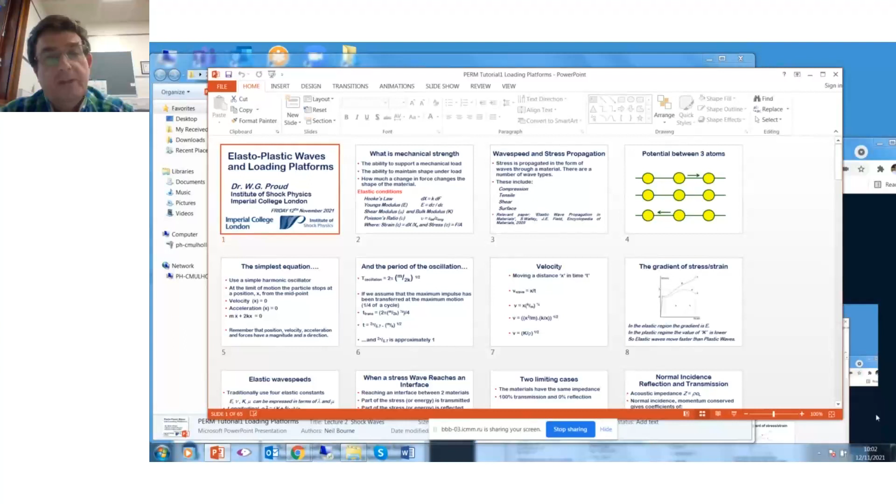I have 65 slides, which is a lot, but what I hope to do is talk more generally and not go through every single derivation, and mainly to give people an overview. And people can ask questions as we go along. If I don't get to the end of this presentation today, this is a series of 7 presentations, and people can send me questions in between presentations. I don't mind answering. I want to make this easy and happy for people.

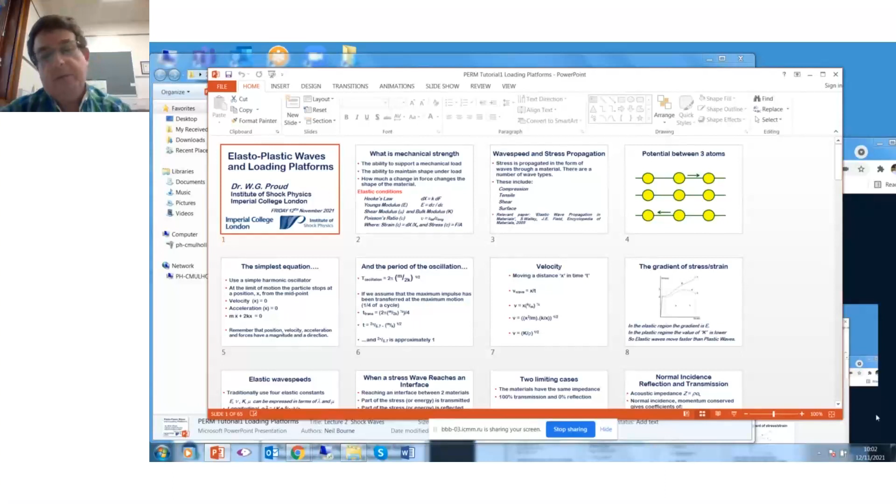You are very kind. It means that we have opportunity to ask you during the presentation. Absolutely, absolutely. Thank you, Oleg. If you ask me lots of very deep philosophical questions, I think I might take a lot longer.

So this morning I'm just going to give an introductory talk about elastoplastic waves in very general terms, and discuss loading platforms, again in very general terms. There is a lot of detail you can find in the scientific and technical literature, so this is very much an overview. There is a review article from 2005, 16 years ago, that I was a co-author of, and I've shared that with Oleg, and you are very welcome to have copies of this and read it at your leisure if you want to look in a little bit more depth.

So when I start talking about loading platforms and waves, I ask students and my colleagues, what is mechanical strength? Well, you put a load, a force on something and it supports it. That's the definition of strength. Another definition of strength is the ability to maintain shape, because we know that stress, the load, and the deformation, strain, are linked. And strength is basically how much a force changes the shape of a material.

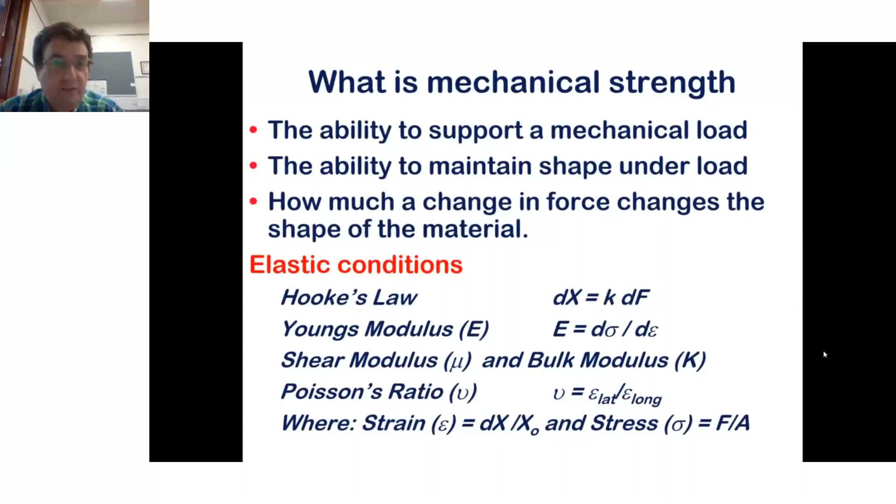So when we think about a load being applied to a material, and particularly a load that's being applied dynamically, the stress is propagated through the material in the form of a wave. And just as there are different types of strength, there are different types of waves. There are those which compress the material, those which try to extend the material, we'll call them tensile waves. We have waves that try to move material laterally to what we consider the normal loading direction. Those are shear waves. And there are waves which tend to propagate along the surface.

There is a paper I provided to Oleg where my colleague Stephen Walley and my former supervisor, Professor John Field, talk about different types of waves. And please, again, read that article if you can. It's a very good summary.

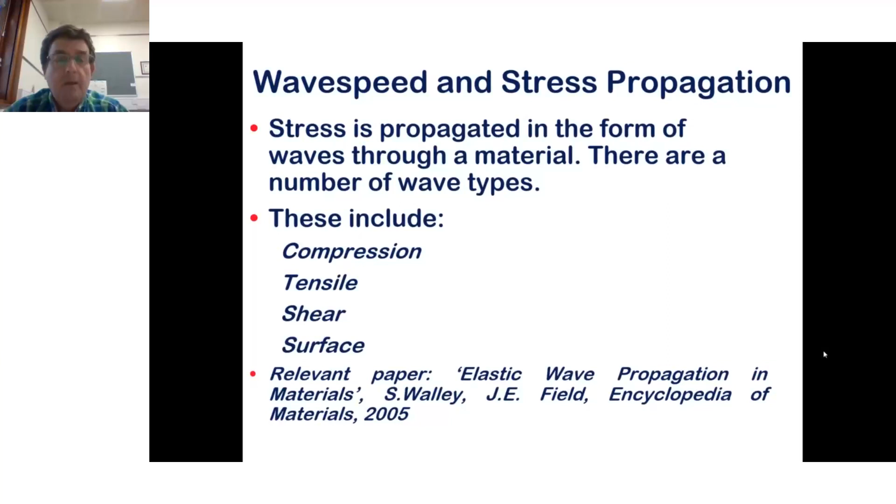If we think about wave speed and strength, we feel there must be a connection between the two. So in a very simple way, and here I am basing my explanation on the work of David Tabor, who was one of the founders in the Cavendish Laboratory of Western European studies on friction, modern versions of friction.

If we look at the potential between three atoms, so here, very standard representation, the yellow circles are atoms, and the line represents the bonding between them. And what we see at the top is there is an atom, and it moves, in this case, in the right-hand direction towards that atom. It then moves backwards to the middle, and then it moves off. So it oscillates between the two atoms. It vibrates between those other two outer atoms.

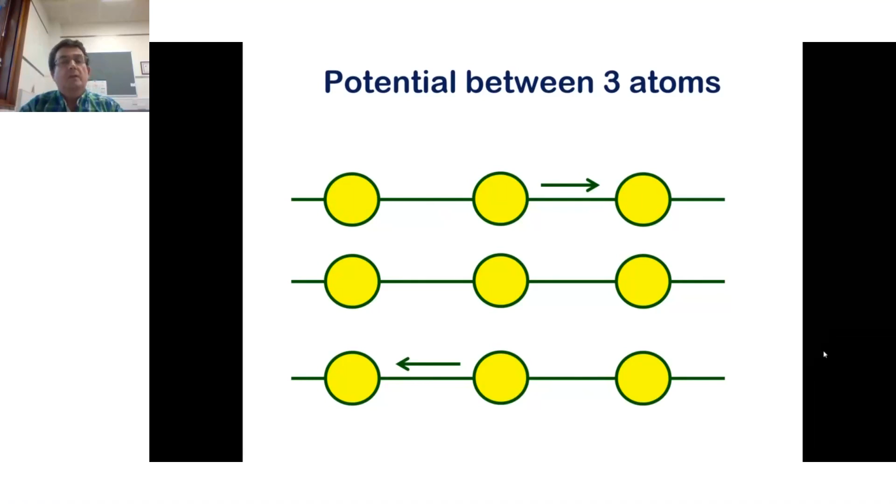So if we want to approach that simply, we can claim it's a simple harmonic oscillator. And as a result of that, we have a particle which moves and then stops at the limit of motion from the midpoint, and then it gets accelerated by the repulsion from the atom it's nearest and the attraction of the atom it's furthest away from. And so we have this oscillating object.

Very simple equation. Velocity x dot is 0 at the limit. The acceleration is minimum at the limit. The acceleration is maximum at the limit, and we can link those two, remembering that position, velocity, and acceleration have both magnitude and direction. So very simple equation, nothing that should cause people too much difficulty.

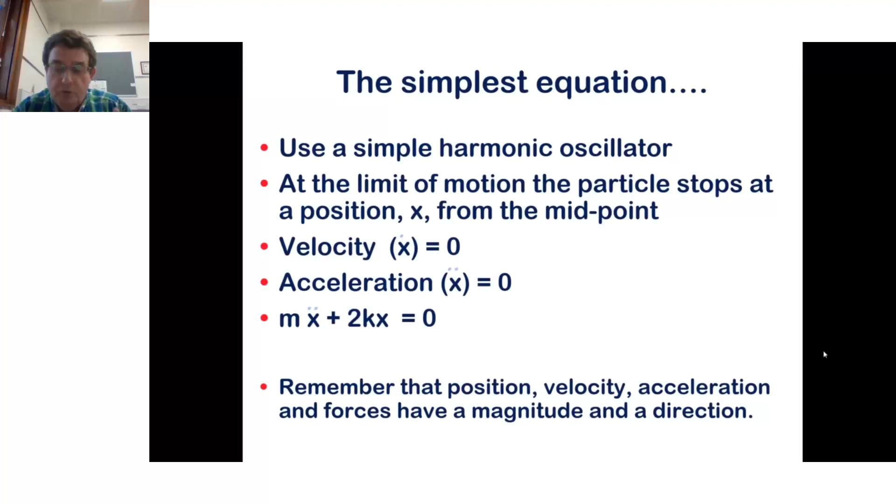If we consider it as an oscillator, that oscillator has a time period, and we can look at what is the frequency of oscillation of a simple harmonic oscillator, and you will have this equation: 2 pi and the mass of the system divided by 2k, and k is basically a measure of the force of those springs. It's the spring constant that we have between those atoms, and that's square rooted.

Now the next part requires an assumption. It's not a very big assumption, but if we assume that the maximum impulse is transferred at the maximum point of motion, i.e. a quarter of the cycle, then we can say that the time for maximum stress transfer, the maximum force between the oscillator and its neighbor, is a quarter of the time cycle. So there, I've just taken that, divided it by 4.

And then I'm going to combine it. And what I'm going to get is time equals 2 pi divided by 5.7, m over k to the half. And 2 pi over 5.7 is approximately 1. You can tell me it's not exactly 1, and I will tell you you're right. You can tell me that there are other ways of deriving this equation, and again, I will agree with you that you are correct. This is just a version that I'm presenting in a very simple way.

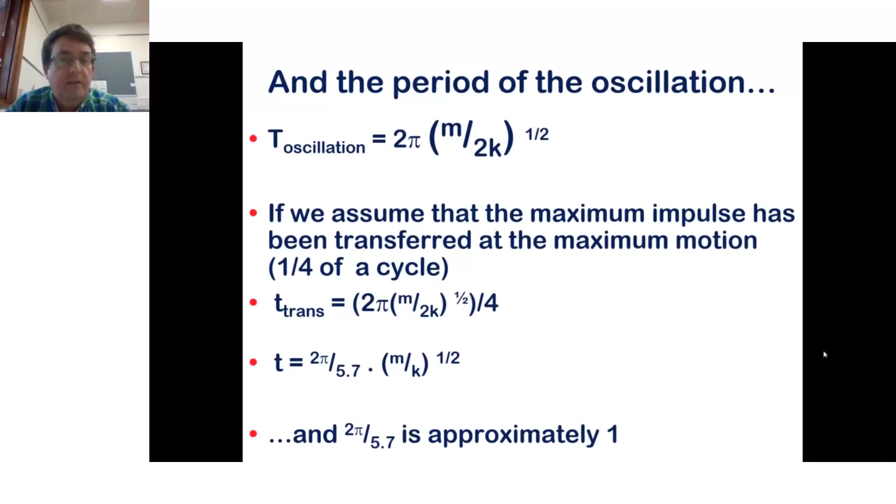So if we think about velocity, velocity is distance by time, which is velocity of a wave representing as movement of stress. The velocity of the wave is distance divided by time. Well, what is the distance? Well, this is this distance x between the atoms. And what is the time? Well, we've talked about the time it takes to transfer from more or less zero stress to maximum stress.

We can combine those terms. So x, we've got this x step in the middle. Velocity equals x brackets k over m to the half. That is the time expression. Now, what is x? X is a distance. Now, we can express distance in terms of density if we remember to basically separate variables. So what we've done here, we've taken that thing and we've separated it into a density term and a thing called k over x.

Okay, so what is this saying? Well, m over x cubed is density. That's that. K, or force divided by distance. Force and distance, that is force being applied and distance, or strain if you want to call it, or motion in the sample. So that is basically strength. So that term, k over x, is a strength term. The ultimate outcome of doing this type of analysis is to say that the velocity of the wave is equal to a strength term. In this case, it's the bulk modulus, because those atoms were moving in the bulk, divided by the density of the material to the power of a half.

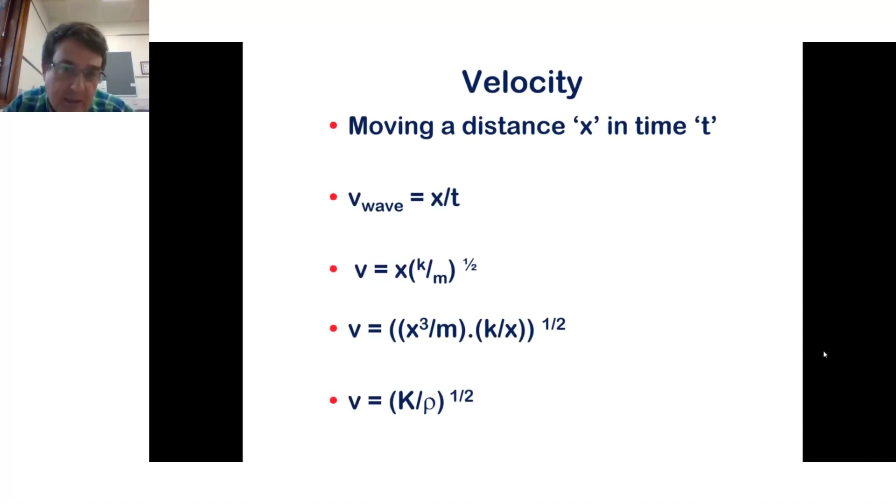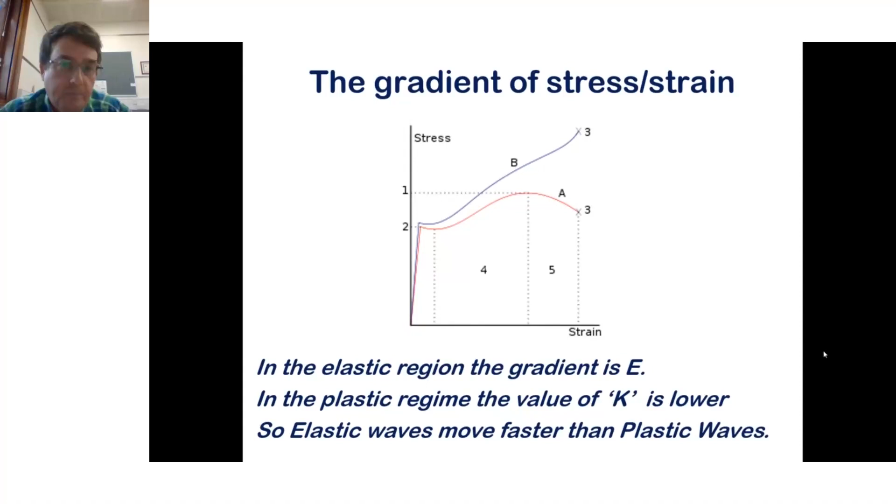So traditionally, we use 4 elastic constants: longitudinal, transverse, bulk, and we have constants, sometimes called Lamé's constants. You can read about those in the literature, which help us define it. But the main thing on this slide is to know that the longitudinal, the transverse, and the bulk wave speed are related to one another in the simplest form via very straightforward equations. These show it. Now, we shouldn't be surprised that the bulk wave speed squared equals bulk modulus divided by density. That was the thing we derived a couple of slides ago. But the other ones follow a very similar process.

The one thing I point out to you at the bottom is a wave speed in the rod. A rod is the Young's modulus, E, divided by the density. Not surprising, Young's modulus was worked out by looking at loading on rods. So it's not at all surprising that the wave speed on the rod is defined by Young's modulus.

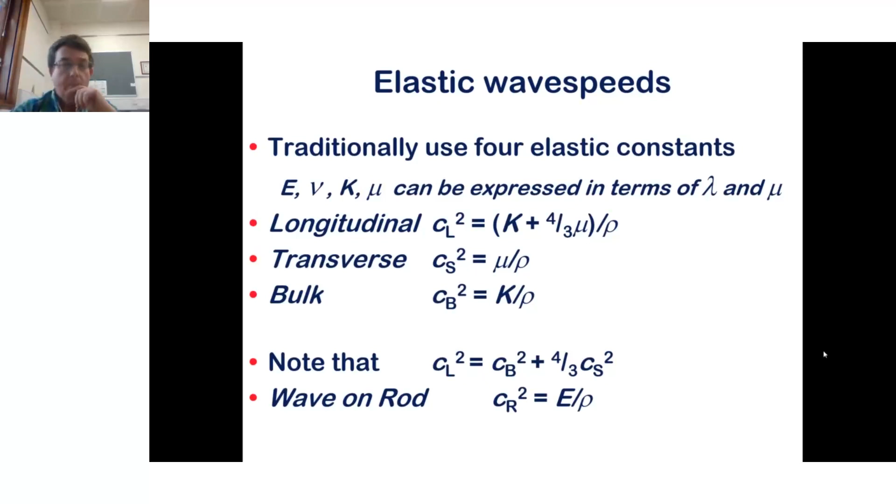Now, in our field, when the stress wave reaches an interface, there's a balance between the two materials. Part of the energy or stress is transmitted, part of the energy is reflected. And this is an issue of conservation of momentum. So we have waves reach interfaces. Some of the wave energy is sent through, some of it's reflected.

What is the controlling property? It's a thing called the acoustic impedance in the elastic regime. And the acoustic impedance is the density multiplied by the sound speed. If you want to try and rationalize what this means, it's effectively the mass per unit time you can put into motion. And it is a material property. Density and sound speed vary from material to material. So acoustic impedance controls the transmission at interfaces.

Now, there are two limiting cases. Two materials have exactly the same impedance. That implies that you get 100% transmission of stress through interfaces and zero energy reflected, or the materials are completely mismatched, meaning one of them has either infinite or zero acoustic impedance, extreme limit there. In that case, zero energy is transmitted and it's all reflected back at you.

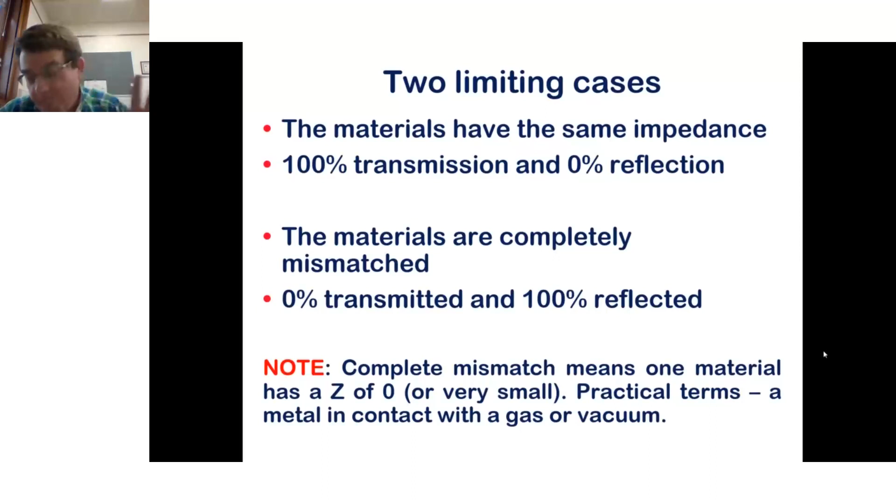It also happens that gold, as in the precious metal gold, and diamond, as in the form of carbon people seem to pay a lot of money for, actually have very, very similar acoustic impedances. Don't try this experiment at home: it's very hard to get a diamond to jump out of a gold ring by hitting it, because there is no wave mismatch at the interface between the diamond and the gold. Just a little fact there.

So as well as complete transmission and complete reflection, you can have some defining equations, and these are given here. T is the amount transmitted. It depends upon a stress wave going from material 2 into material 1. Okay, the amount transmitted is equal to this term here. It can be worked out by conservation of momentum. It takes a couple of pages of A4 to work through this. Again, not terribly difficult. The amount reflected is dependent upon the difference in impedance.

But if you think about, say, a polymer-metal interface, well, a polymer has a low impedance, I'll say that in a lot of these talks, and the metal has a high impedance. What does a negative reflection coefficient mean? What it means is that something which was originally a tensile wave, something that is reducing the stress in the system, is reflected as a compression wave, so it changes phase. Hopefully people are familiar with reflection at interfaces and realize that sometimes you get changes in phase of light, changes in phase of stress waves when things are reflected from interfaces. And basically this is assuming normal incidence of the wave, so the wave going straight into the surface.

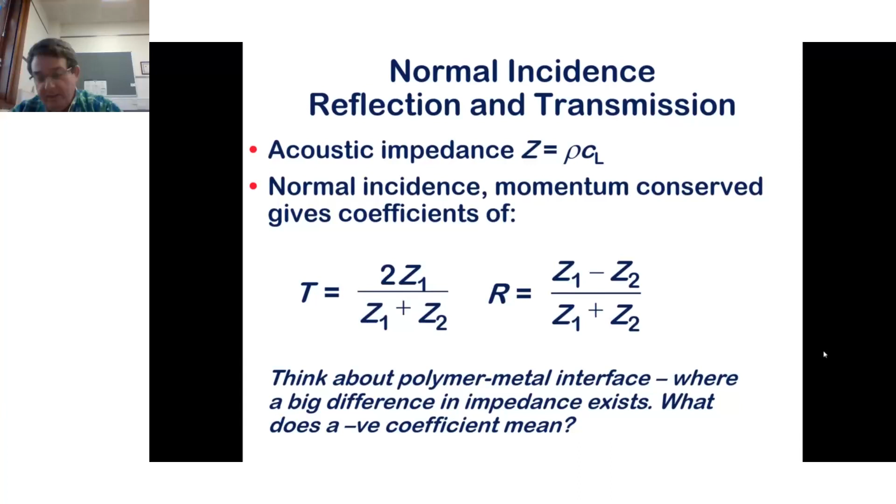And the relationship between stress and particle velocity in the system can be derived in a shockwave lecture, which I'll give. The defining equation here is change in stress equals density times sound speed times change in particle velocity. Particle velocity changes at the interface, changes due to transmission of energy through the material. So the change in stress equals density times sound speed times change in particle velocity in the elastic regime.

And when I go into a shock regime, when I go to very high pressures, then the sound speed of the material changes. And that means that that term C stops being C and becomes something more complex. Not generally very much more complex, but it becomes a term that is stress dependent. But simple equation, change in stress equals density times sound speed times change in velocity of the particles in the material. And that means you can start to track what's happening at interfaces and what's happening within materials.

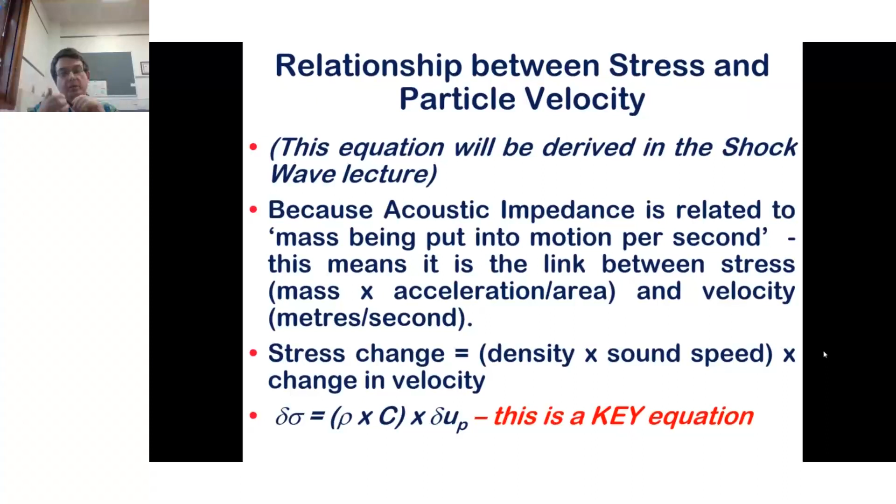So, dynamic testing of materials. I've set up some basic concepts there, hopefully very straightforward for you. Revision, you'd probably tell me that you've done more complex analysis, and you're absolutely right. Okay, dynamic testing of materials. So it's the 19th century. People are building bridges and trains.

They're building metal structures. They're developing engines. High loading rates on materials become more common. And also, people have greater control of the materials they are using. They're using engineering materials. They're using motors. They're using cutting machines, etc. So dynamic response of material becomes important.

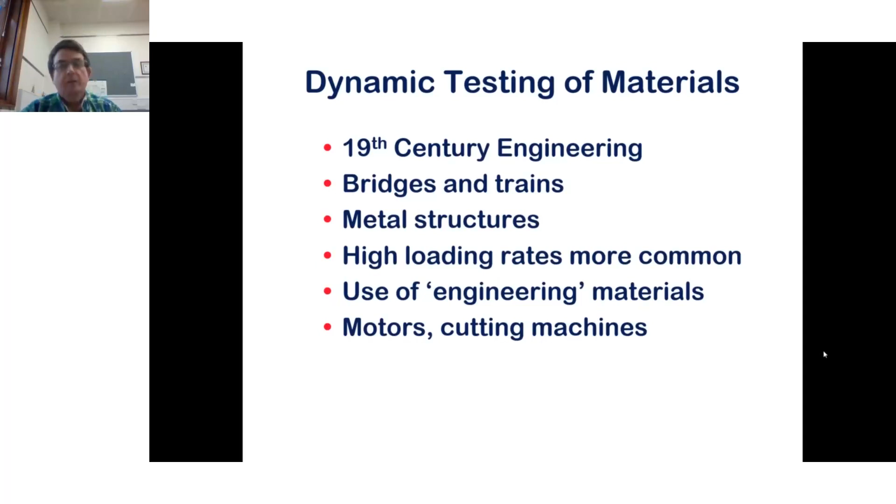So this gentleman here is John Hopkinson, Professor of Engineering, King's College London. And he had an experiment where he had a wire suspended between a flange, a weight at the bottom, and the ceiling. And the wire was about 10 meters long. And he had an annulus. This is this kind of cylindrical thing in the middle that he used to drop along the outside of the wire, and it hits the weight at the bottom.

And what he discovered doing these types of experiments on wires was the failure of the wire does not depend upon the kinetic energy or the mass involved, but it was very strongly dependent upon velocity. Yes, you could put a static weight on the system and break the wire. Absolutely correct. But if you're doing a dynamic loading, velocity turned out to be a key component.

And what he discovered in more detail was if he dropped the weight from a very low height, the wire didn't break. Absolutely fine. It's within its elastic limit. It's within its normal strength. If you hit it very hard, it broke instantly, and it broke at the bottom of the wire.

But there is a range of energies where the wire breaks at the top or the bottom of the wire. So there is this intermediate range where you cannot say in advance where the failure will occur. Hit it very hard, the wire will break at the bottom. Slightly less energy, top or the bottom. So this got people thinking about waves moving through materials. This is a very key experiment in starting this field.

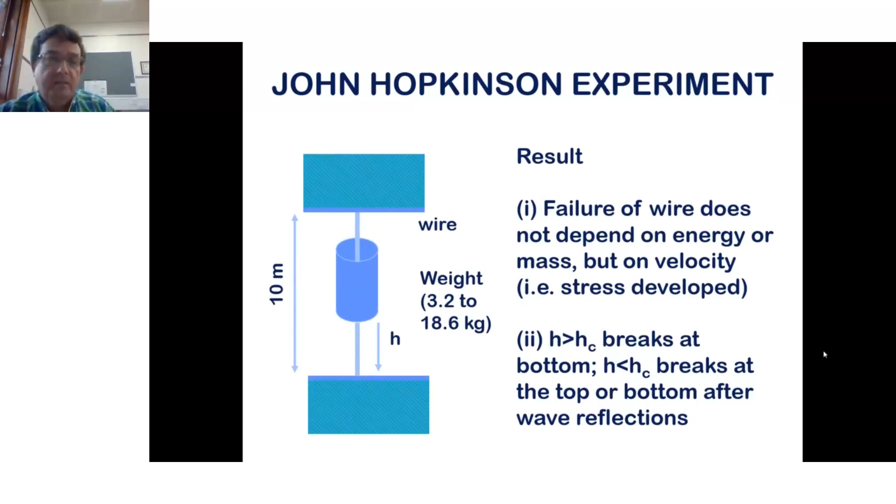So basically, if you've got a weight hitting the bottom of the wire, then it puts the wire into motion. And so the stress you're developing will be density of the wire, the sound speed in the wire, which we know is related to Young's modulus, and the velocity of the particles within the wire. So the stress developed was equal to rho C V.

When that wave gets to the top of the wire and reflects from the ceiling, it comes back reinforced due to a wave reflection, due to the impedance mismatch at the ceiling. Basically, the ceiling, you hope, doesn't move very much. It's very rigid. That wave comes back reinforced, and the reflected stress is approximately doubled. Not quite 100% doubled, but certainly 99% doubled.

What he also discovered is the dynamic failure stress with this loading was much higher than the static failure stress. That was a key discovery. So velocity is important in the failure of materials, and dynamic failure happens at stresses which are higher than static failure stresses. This is the foundation of this entire field.

People in later years studied materials at different loading rates. So here I have a graph. It's log of loading rate, epsilon with a little dot on top, on one axis, and stress in gigapascals is on the other axis. And what we see here is a very standard relationship that when you're going from strain rates of 10 to the -4, quasi-static creep loading, to strain rates of round about 10 to the 0, that is a kind of standard mechanical engineering laboratory test that you would conduct on materials.

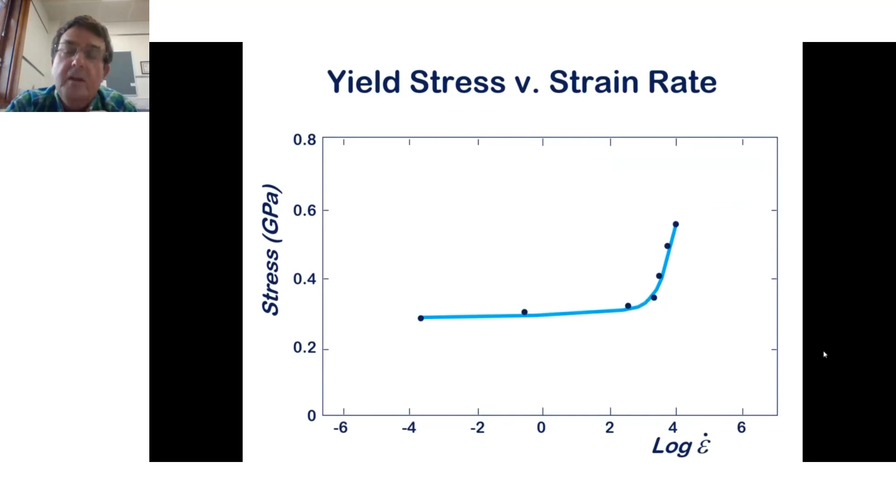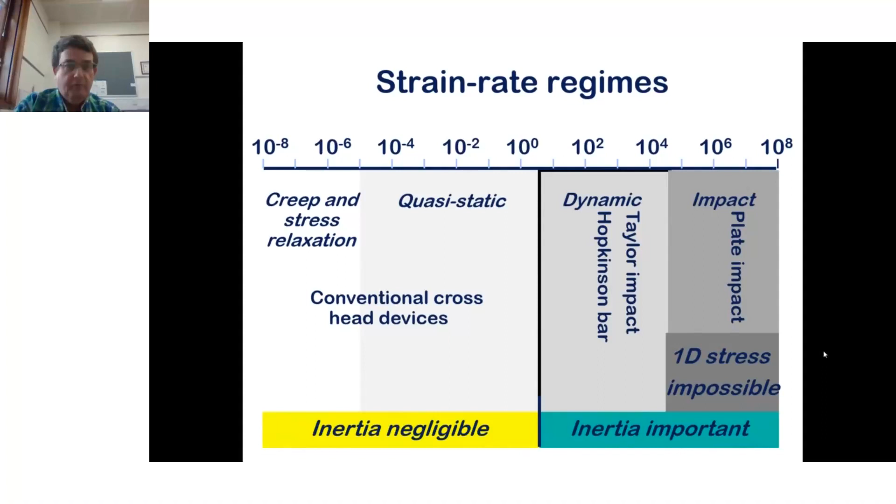And what we have here is a rough division between creep stress relaxation processes, quasi-static processes, dynamic processes, which are 10 to the 1 and above, Hopkinson bar, Taylor impact, which I'll mention in a little bit more detail, ultimately going up to regions where the sample basically doesn't have time to respond in a homogeneous fashion. The system becomes very much wave dominated, and that's investigated in the shock regime. And you can see at the bottom, inertia is negligible at low rates, increasingly important as you go to those higher rates.

So John Hopkinson, unfortunately, died, as is indicated here, in 1898. He also died with his older son and a number of daughters. They were walking in Switzerland, and unfortunately, some part of the mountain fell upon them and killed them. So because of this, the Department of Engineering in Cambridge wanted another professor of engineering. So they chose John Hopkinson's second son, Bertram Hopkinson.

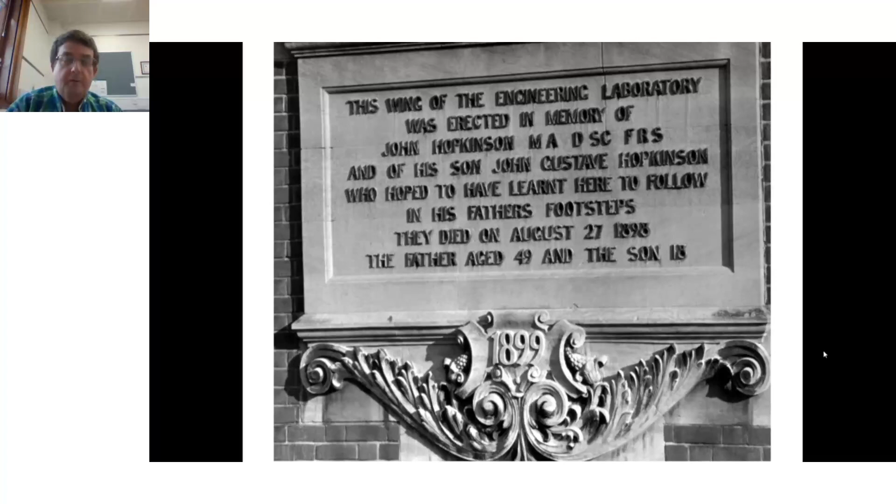So this is Bertram Hopkinson, and he again looked at dynamic loading of materials. And he came up with this really fascinating device. This is his first Hopkinson bar apparatus. This shows a drawing of a tea chest, so a wooden chest, D. There is a rod of material, B, and there is a little extension to that rod, C, and A is a detonator, or it can be a bullet impacting it.

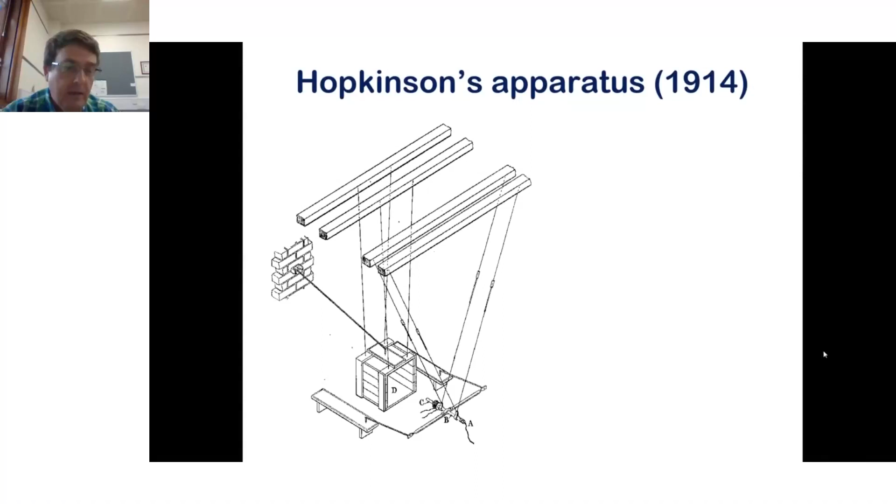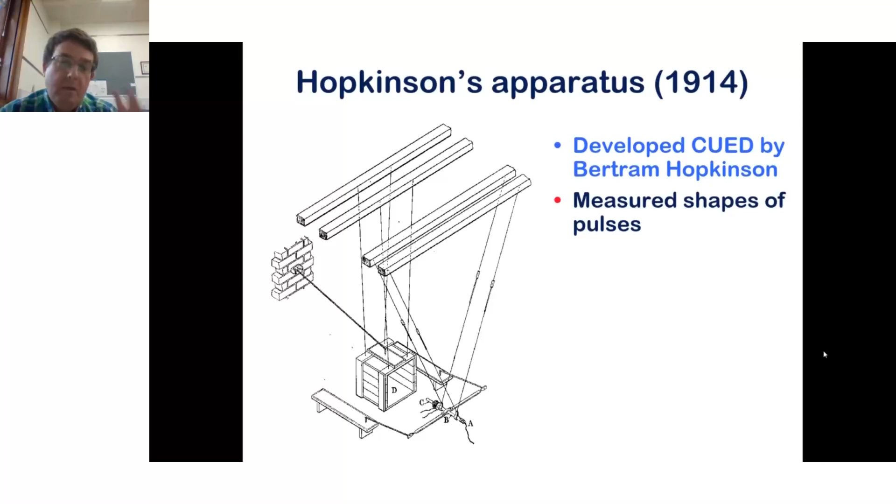And you can see around that rod, there is a piece of wood, and that leads off to two beams and a couple of rods with pencils on them. And you can also see the wall of the building at the back, and there is another rod with a pencil on it, and that's attached to a piece of paper. Very simply, at the Cambridge University Engineering Department, Bertram Hopkinson measured the shape of pressure pulses using this apparatus, because that little block of material C, he can change the length of it, and he can trap different amounts of momentum, different amounts of energy by changing the length of that momentum trap.

And this is well in advance of using strain gauges. What he does is the impulse, the impact at point A, causes that momentum trap C to jump off the end of the rod into the tea chest D. The tea chest D is suspended like a pendulum, and it moves because of the energy delivered to it by that momentum trap. And the amount of movement depends on the energy trapped in the momentum trap. So by looking at the length of the line drawn on the piece of paper by the pencil attached to the wall, he can measure the energy trapped in that momentum trap. He can vary the length of it.

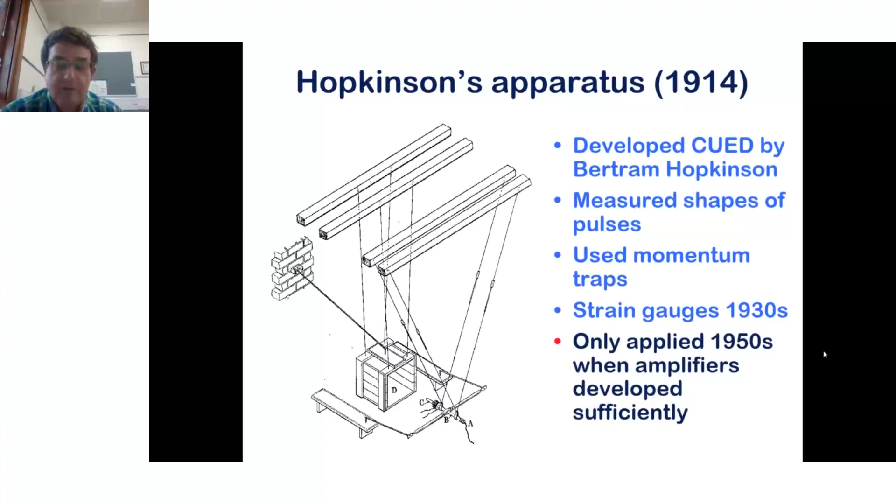What he was capable of doing in 1914 was measure the pulse shape in a rod with microsecond resolution using a tea chest, a pencil, and some paper. This is, I think, marvelous. This is wonderful. And people used other forms of apparatus, other forms of diagnostic. I love this equipment, but it's not really practical for fast experiments, but still very good. Strain gauges and strain gauge amplifiers came along in the 1930s and 1950s. They help a lot in making this world work a lot more quickly.

So this is the original split Hopkinson pressure bar developed in 1949. Same idea, but it's split because the specimen material is now put within the bar as indicated. This was developed by Howard Kolsky at a company called Imperial Chemical Industries in the UK.

Now, one thing that was discovered is that if you send a stress pulse down a rod, it disperses. And this means that you go from a nice rectangular kind of pulse to something with oscillations. These are called Pochhammer-Chree oscillations. It's because stress can go straight down the central axis of the rod, or it can reflect from the sides.

There are quite well developed mathematical expressions to explain the shape of those pulses. They are quite complex. You can read them in Kolsky's book on stress waves in solids, if you like. Pochhammer and Chree wrote this theory in the latter part of the 19th century.

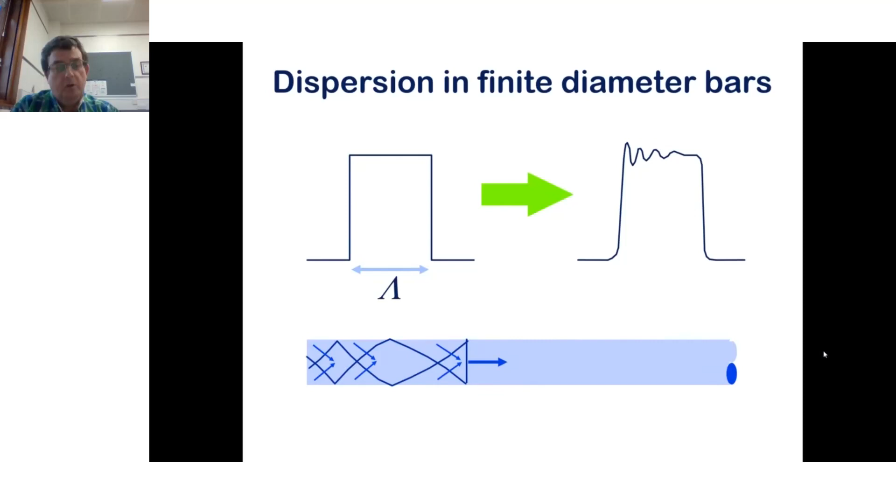That shows real data. So the undispersed pulse is the blue square, the blue rectangle. Real data gathered from a real rod of material using a strain gauge to measure the signal in the strain gauge with time. That is the more ramped dark line with the oscillations on it. It's an effect of the shape of the material. So here's a complication. The signal we get is dependent upon the material shape.

And here we have an example of what happens if you let a wave oscillate backwards and forwards up and down a rod of material. In this case, an Inconel, it's a form of steel, an Inconel bar. And I've just overlaid the pulses here. One, the incident pulse, the reflected pulse, the pulse after it's been reflected twice, 3 times.

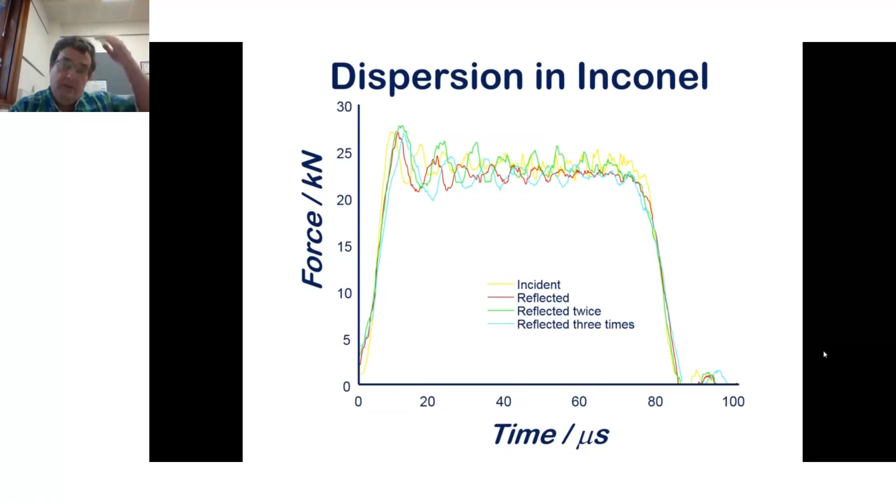And what you see is basically, yes, the detail of the shape changes, but the average level of the force is pretty constant. So this means you can reflect waves off interfaces, and there will be differences in the detail, but in the broadest sense, the stress level recorded will be the same.

That sample gets crushed. It transmits some force into the output bar, and some pulse is reflected because there's an impedance mismatch. That's why I wanted to talk about impedance at the beginning of this lecture. An impedance mismatch occurs. Some of the force is transmitted, some of the force is reflected.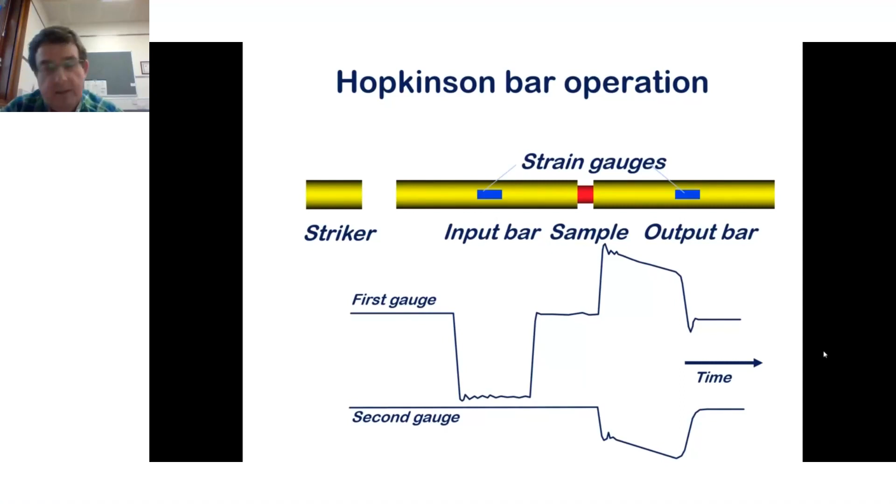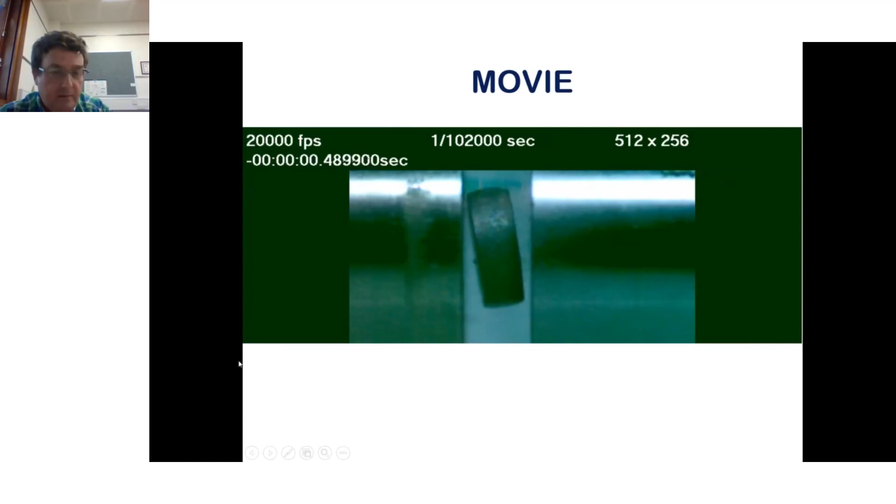So here's a movie showing a Hopkinson bar in normal operation. Here you go. That is it. That is your experiment. You can see pulses oscillating in the bars. You can see the sample gets hit multiple times. But what we're interested in this system is that first compression. Now, that is most of the data. That is not what you're interested in. All of this bouncing around complicates the analysis. We're not interested in that.

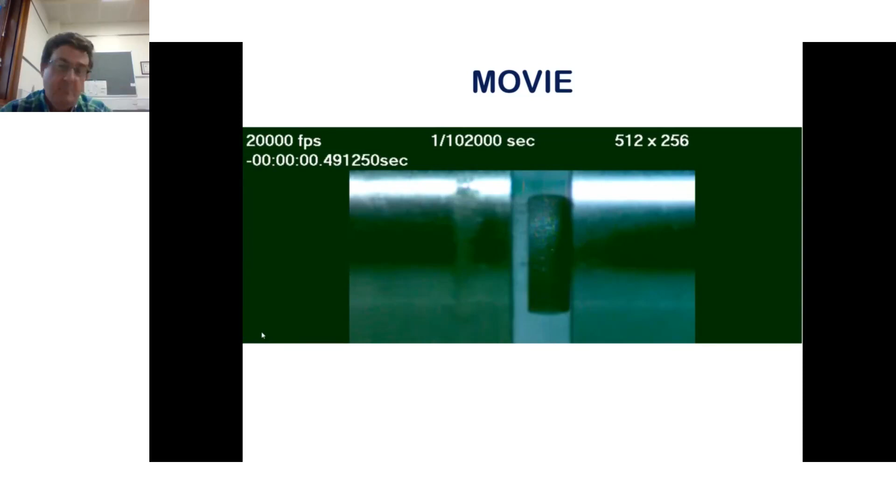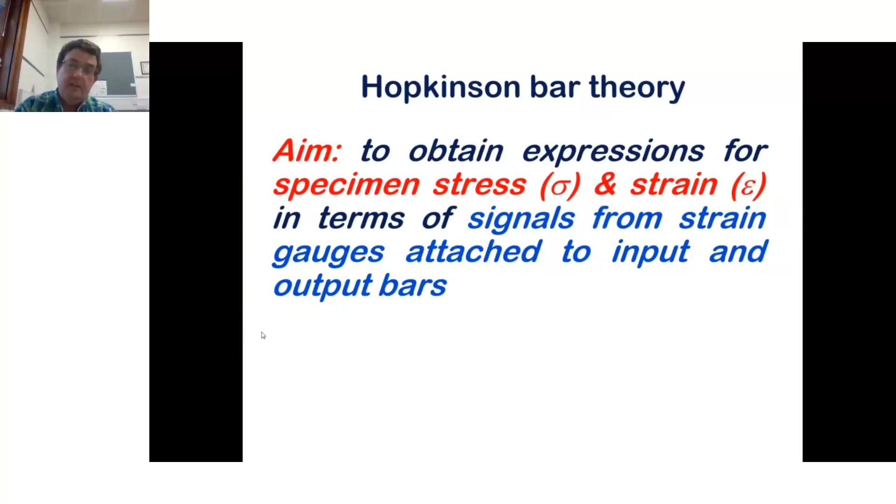You can look it up in a number of books. For the purposes of time, I'm going to skip going through this part in detail, but I'm happy to discuss this with people who are so interested.

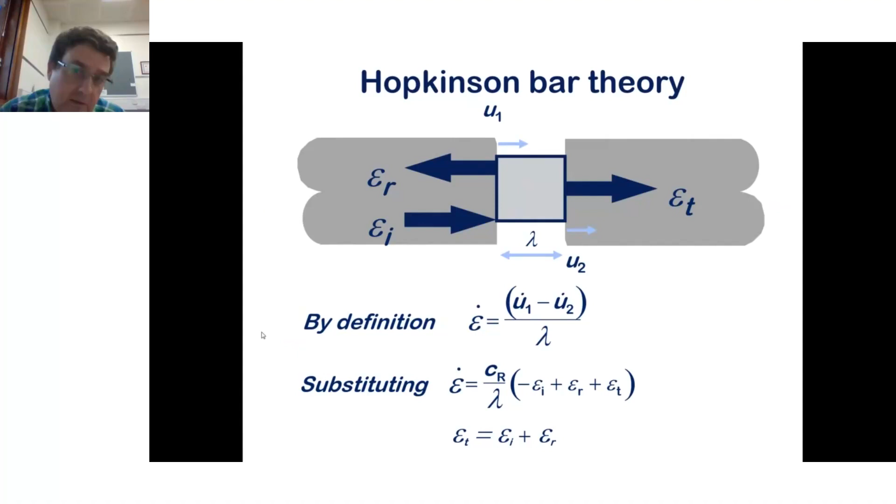Fundamentally, the strain rate that you record in the Hopkinson bar experiment depends upon the reflected pulse, because the reflected pulse gives you information on how much the bar has slowed down, and therefore how fast it is compressing the sample. And the stress that the sample is experiencing is strongly connected to the amount of force that the sample is putting onto the output bar.

So the strain rate you measure on the input bar using the reflected signal, and the stress you measure using the transmitted signal, making a very big assumption that the specimen volume remains constant.

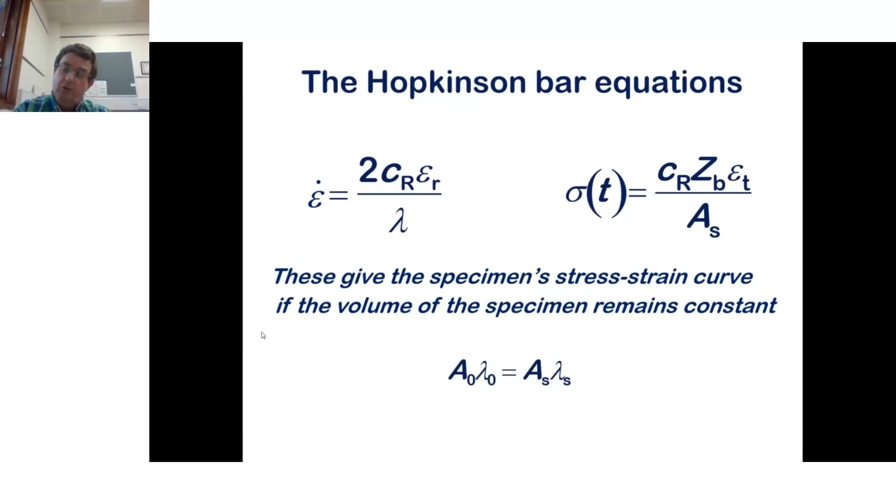And we also, looking in more detail, realize that this sample stress increases in steps. There are wave reflections occurring within the sample. Stress takes time to transmit. A wave speed in a piece of metal, say 5 millimeters per microsecond, 6 millimeters per microsecond. So it takes 2 microseconds for a wave to go through a 5 millimeter piece of sample and be reflected and come back to the input interface.

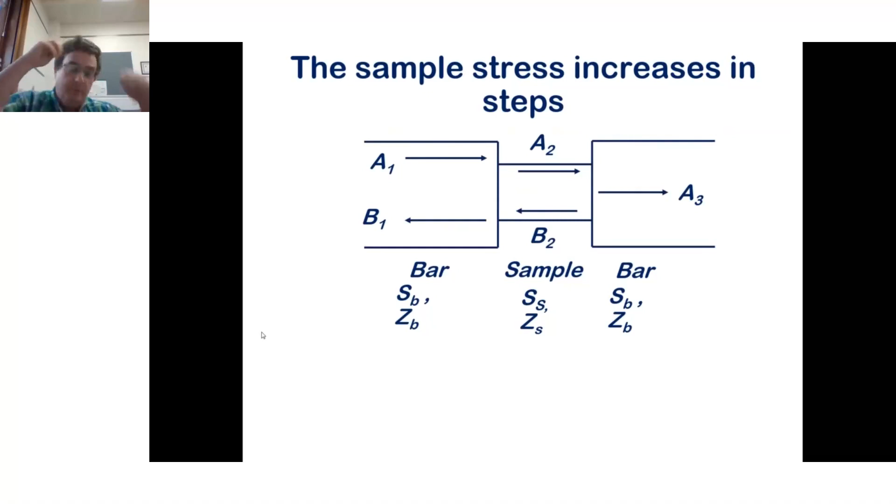So things take time. So this is showing how it takes. Wave reflections occur, stress increases in steps, and the wave builds up. And you can make a prediction on that, and you can try and measure for a long sample how long the pulses will take. And the prediction means that I got a piece of paper, a piece of graph paper. I did a very simple calculation.

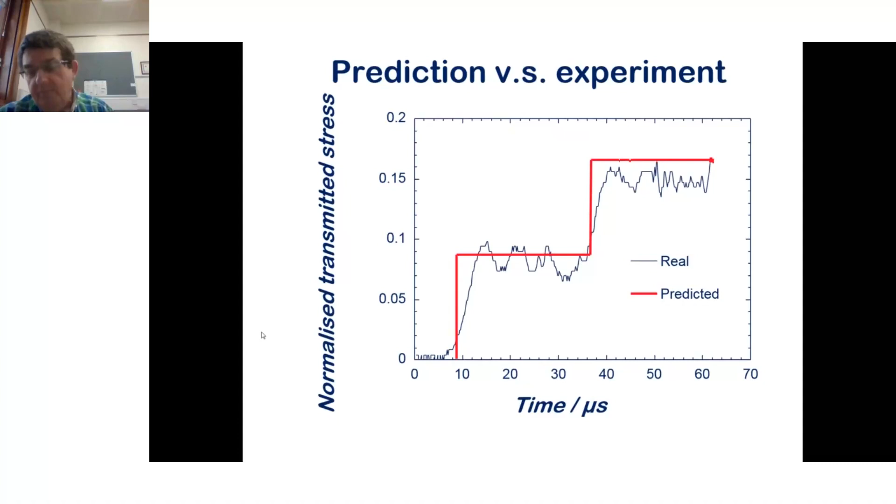I assumed velocity was constant, and I drew that red line. And the real data came back as the Pochhammer-Chree influenced black line. And for something that took me 5 minutes to draw, it's a pretty good agreement. If you wanted more complex agreement, again, lots of publications in the literature.

However, we've got to take things into account. If we make big assumptions, then other things can occur. We can assume that the analysis is simple, but we've got different equipment. We have different sample preparations. We have different materials which give us different time until the stress in the sample has equilibrated. We've got inertia, we've got friction. All of these things can change.

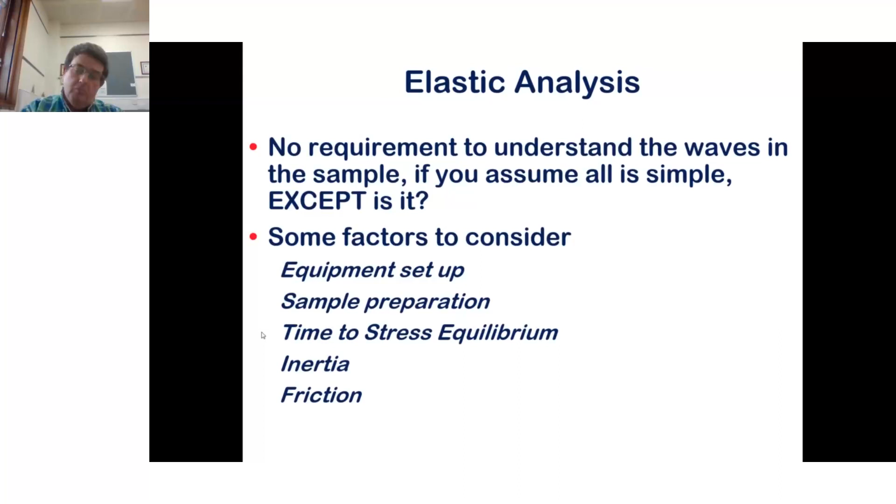So what does that look like? Well, we can never perfectly align bars. We assume that the gauge sees what the specimen sees. More or less, that's correct. We assume we know when pulses rise. That's another assumption we're making, so that we can align transmitted and reflected pulses in terms of time of behavior at the sample. Those gauges are remote from the sample. We have to move the time basis to say what we believe is happening at the sample. And we got dispersion as well.

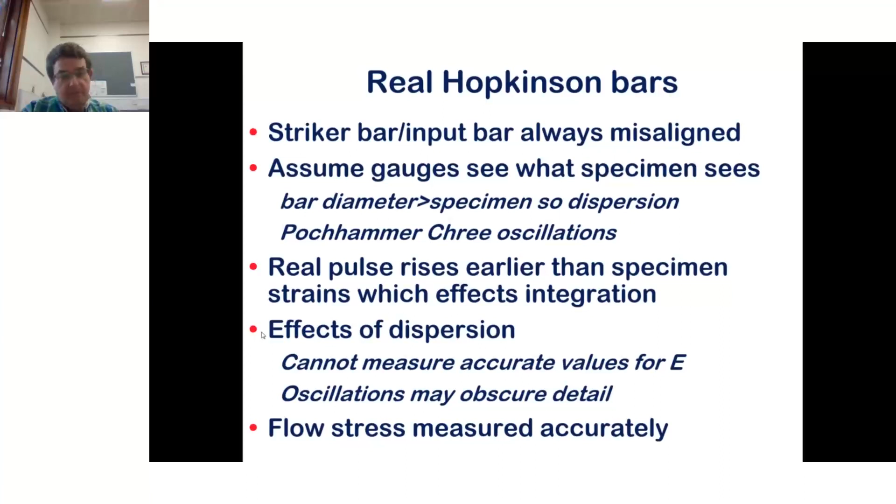So we cannot measure, say, Young's modulus using a Hopkinson bar, but what we can measure with great accuracy is the flow stress. So it's a particular tool for doing strain rates of 10^3, 10^4, and the flow stress is measured accurately. Seen that one before, Pochhammer-Chree, undispersed pulse. So a simple analysis is like the red line. A complex analysis can reflect the more detail in the data.

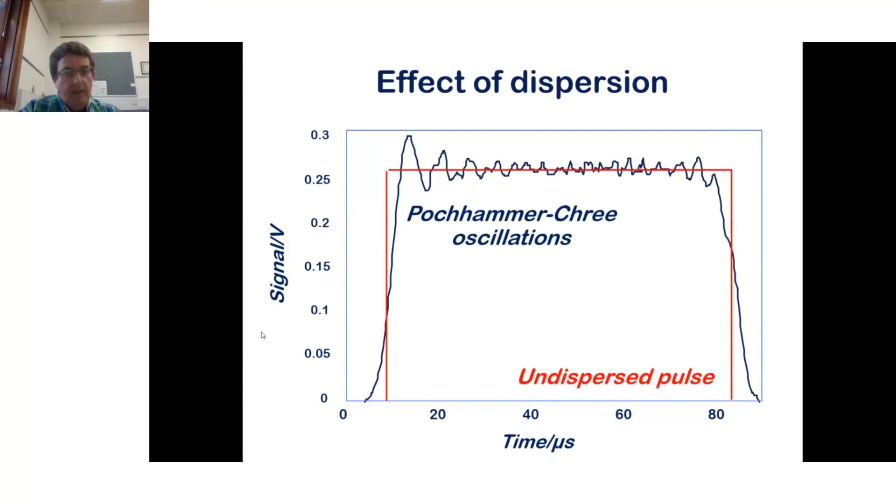But if what you want is the flow stress of the material, when is that signal nice and flat, you can just draw that line straight through those oscillations and get the flow stress with great accuracy. If you've got two samples of an identical material, but you put different surface roughnesses on it, so the beginning of the stress rise is affected by that surface roughness, you will get those two different angles of stress strain at the beginning. But the flow stress, when the material is moving sideways, as you see, the top of those lines match quite well. So Hopkinson bar, a lot of discussion, but flow stress is measured really well, really accurately.

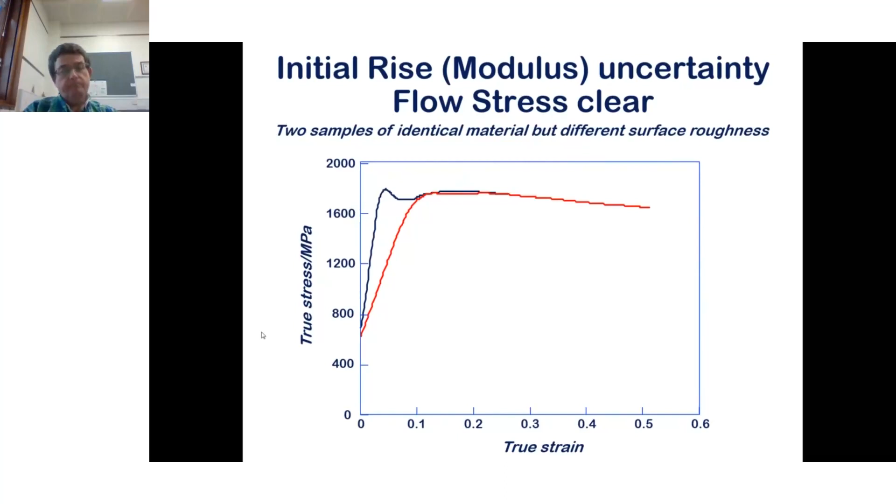We can discuss friction and inertia. We can talk about changing temperatures. There are a number of factors to take into account. If you're worried about friction in your sample, I would say do the experiment without lubrication, do the experiment with lubrication between the sample and the bars. See if there's a difference. No difference means friction isn't a big effect. It's pretty straightforward. And here are some high-speed images of a split Hopkinson pressure bar.

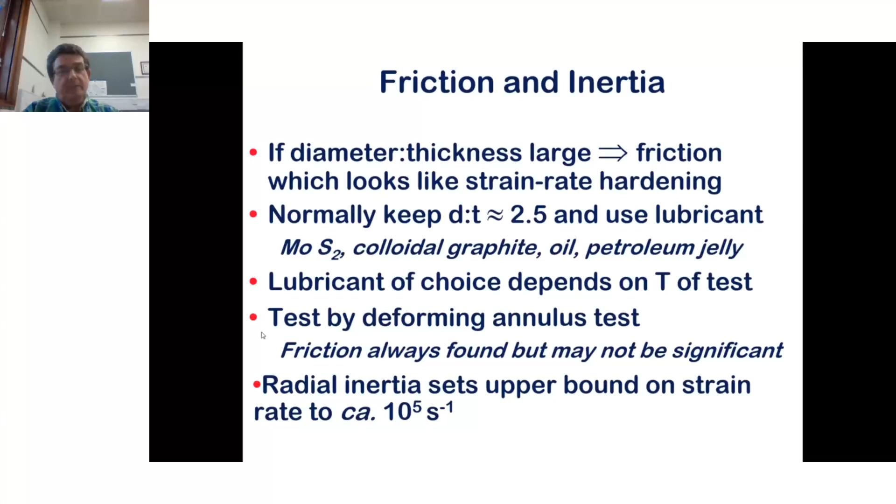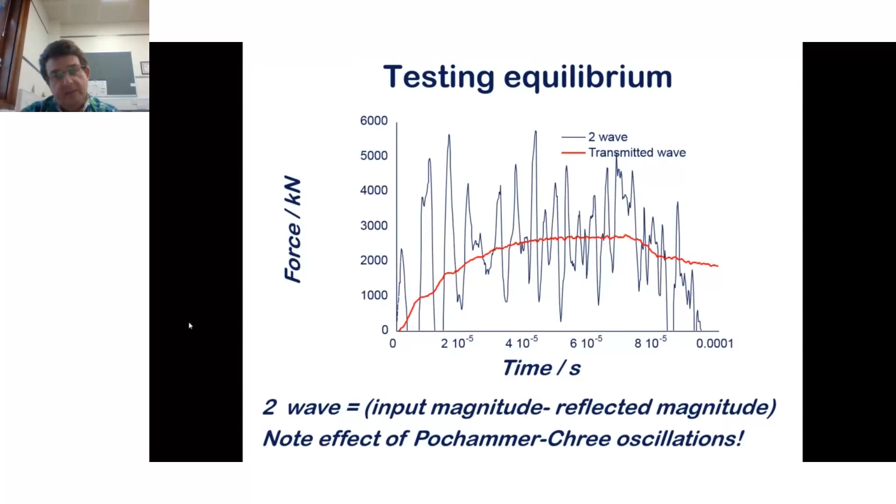So here's the movie. What were these slides about that I flicked over so quickly? Basically saying that sometimes it takes time for a sample to get into stress equilibrium. We can discuss that later. Sometimes you get very poor signal transmission. Yep, got to be careful.

Sometimes you don't know when the stress rises. I know the stress started to rise. There's a curve there. When did that curve start? Don't really know. Have to go work it out. How does stress move? How does the stress speed move through the sample?

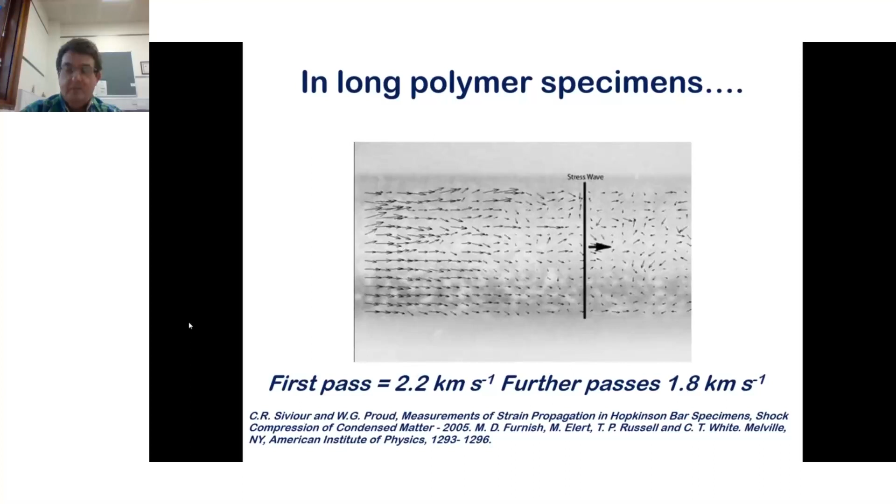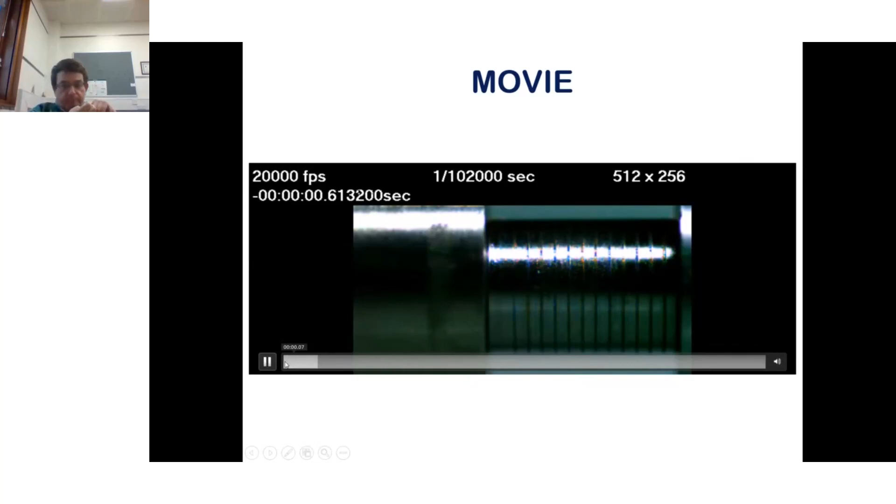Here's a movie. This will show a lot of what I've been talking about in a bit more detail. So long bit of sample. Oh, look, is that even deformation? No, it's being quite badly affected there. Those lines are just drawn on the sample to give you an idea. So let's play that again. So there's your sample. As you see, there is more detail going on there than a simple equation will predict. So having diagnostics like high-speed photography helps us immensely in looking at the detail of the system.

So is there an upper limit? Yes, there is an upper limit for Hopkinson bars. You can hit the sample so hard that you damage the Hopkinson bar equipment. The bars become plastic, and inertia has an effect as well. So there's a paper by a gentleman called David Gorham. I will supply Oleg with a copy of it. He will share it with you, I hope. And we can talk about the effect of inertia on the samples you read.

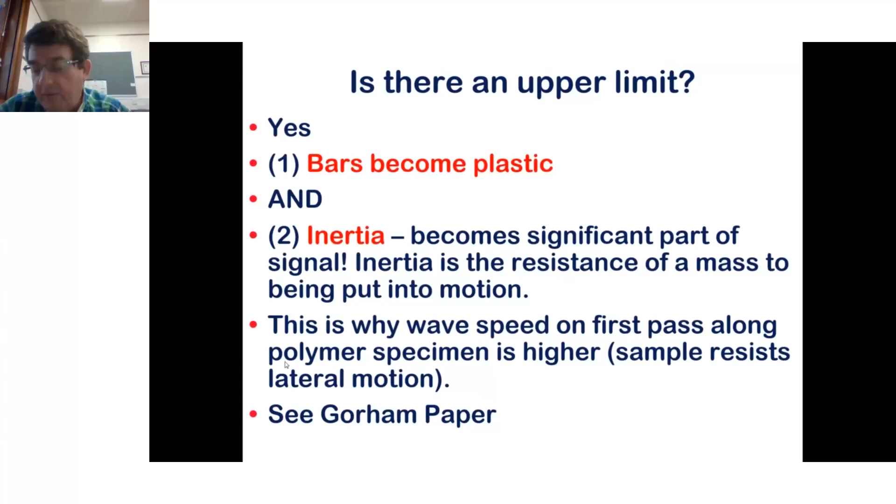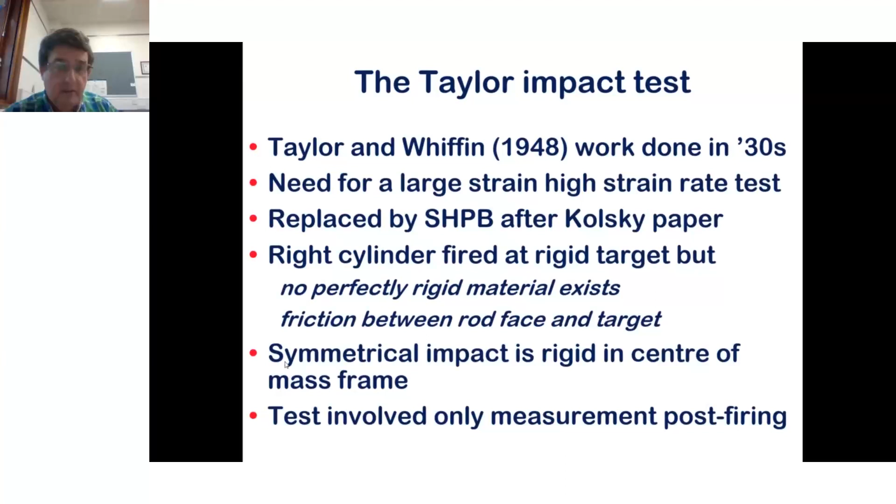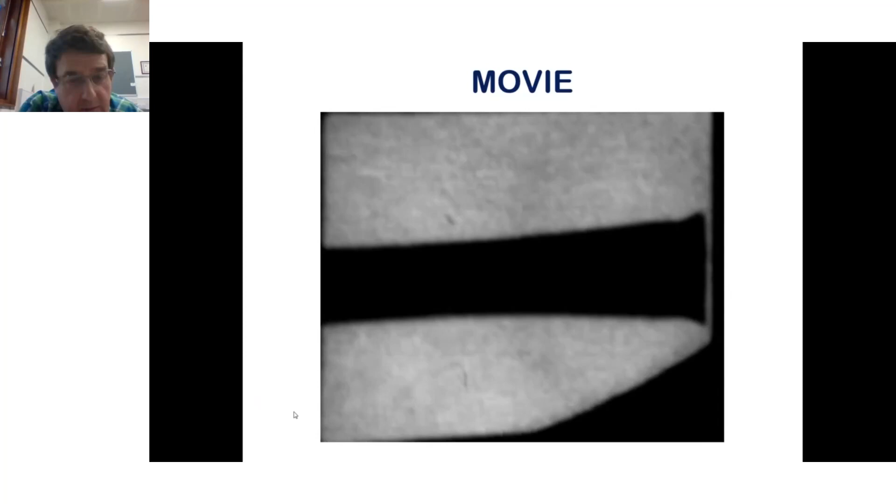So let's have a look at what the experiment looks like. On this side of the screen here, we have a rigid target, and this is a rod that's being fired at that target, at about 100 meters a second. So the rod goes up to the thing, impacts it, deforms on the surface, and then eventually it bounces off. So I'll play that again. This is the impact of, in this case, a copper rod on the surface of the material. Okay, there it is. Fairly straightforward, I hope.

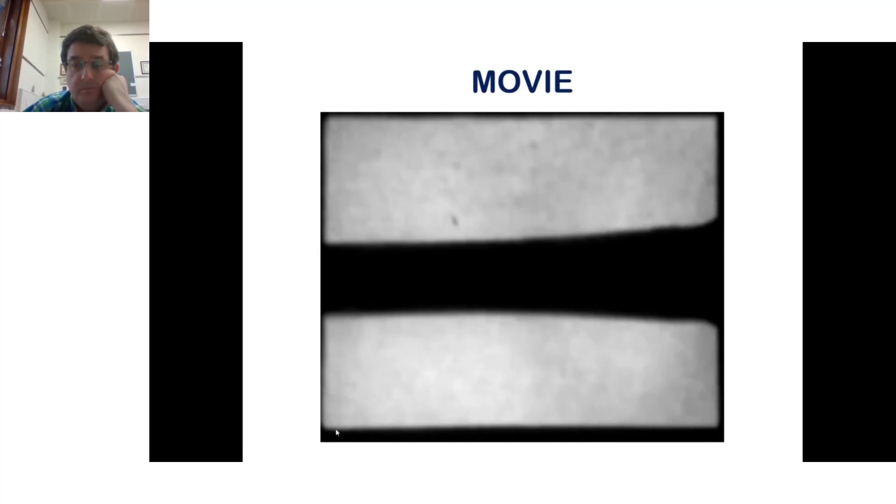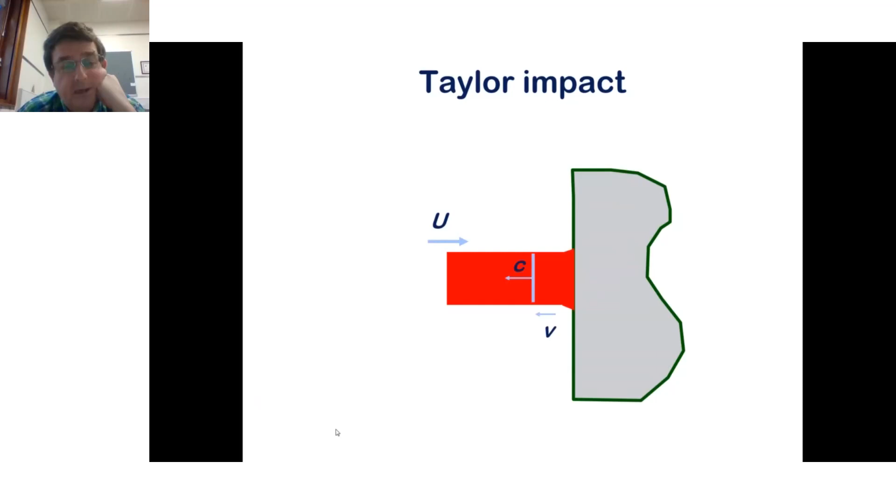What we're doing, we're firing a rod at velocity u at the surface of a target. It's got an initial length of rod, L0. We send an elastic wave, which moves quickly through the material, and we've got a slower moving plastic or deformation wave behind it, moving at a velocity v. That elastic wave reaches the rear interface of the rod, reaches the back of the rod, and is reflected.

Now, I mentioned impedance differences and change at interfaces. You look at that and think about it. What is the change? Well, the rod is slowed down, and the amount it's slowed down is twice the stress associated with the elastic limit, the yield stress, divided by the wave speed in the rod and the density of the rod. So that simple John Hopkinson style equation is useful in describing this dynamic event.

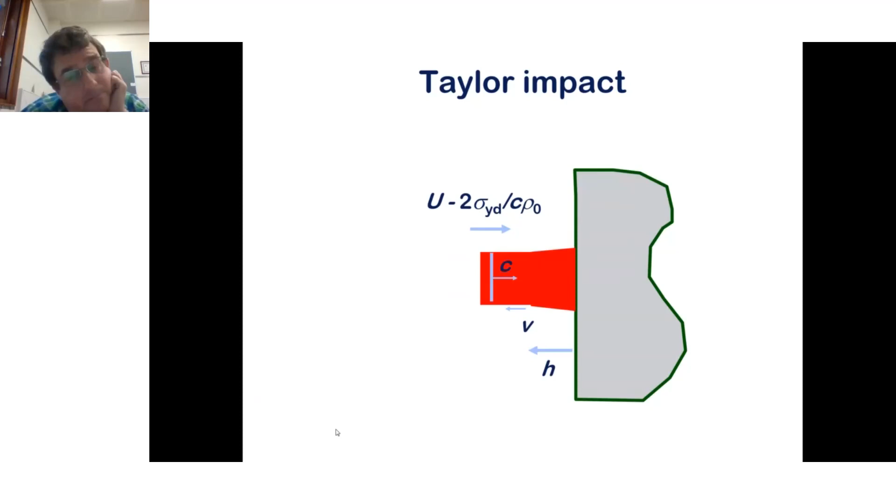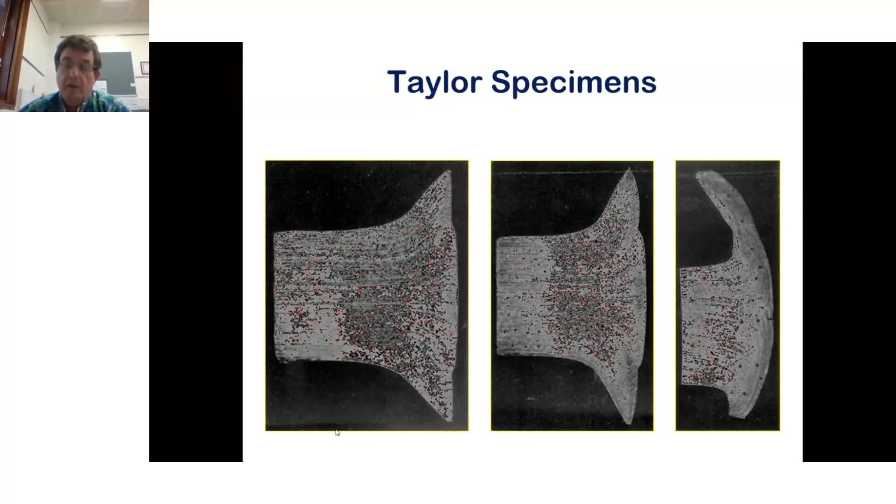So that wave goes back, it meets the plastic wave. What does it do with the plastic wave? It interacts with it, it takes away stress, it slows that plastic wave down and eventually stops it. You're left with one part of the rod at a certain deformation, another part of the rod at a very strong deformation. Here we have 3 examples of Taylor impact specimens obtained at different velocities. The shape is different because the strain rate was different. Yield strength depends upon strain rate. So I hope that you can see that we're talking about elastic waves, plastic waves.

We have wave reflections at interfaces. We can make very simple assumptions. We can make very complicated assumptions. But ultimately, it's reflection of waves at interfaces which becomes important. Taylor's analysis was not particularly complicated. Yes, it occupies pages of a journal article, but it was approximate, and he always recognized it as that.

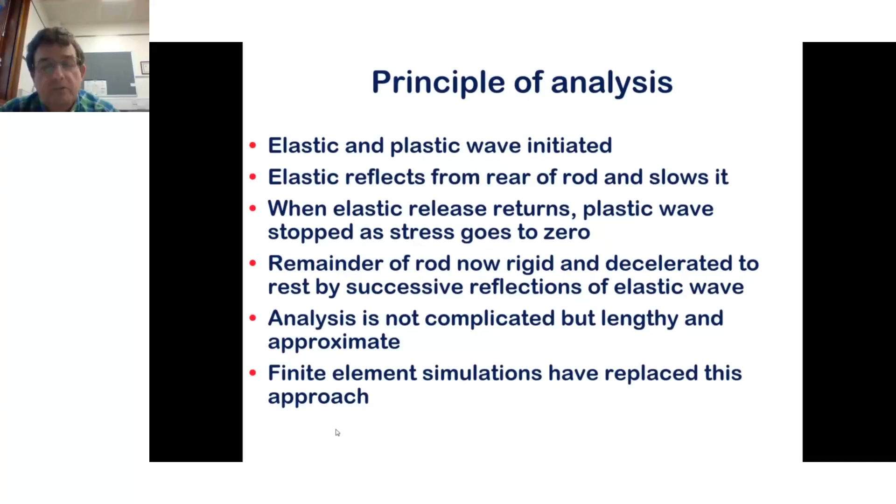You can do a thing called symmetrical Taylor analysis, where we have a rod hitting a rod of the same material. That is useful for two reasons. Number one, if you're doing modeling, the center of mass of the experiment is always between those two rods. And also, as the rod deforms and spreads outwards, the rods expand at the same rate. They're the same material, so friction doesn't have any effect because they're moving outwards at the same rate. There's no friction between them. Simpler arrangement in terms of analysis, a little bit more irritating when you come to set it up.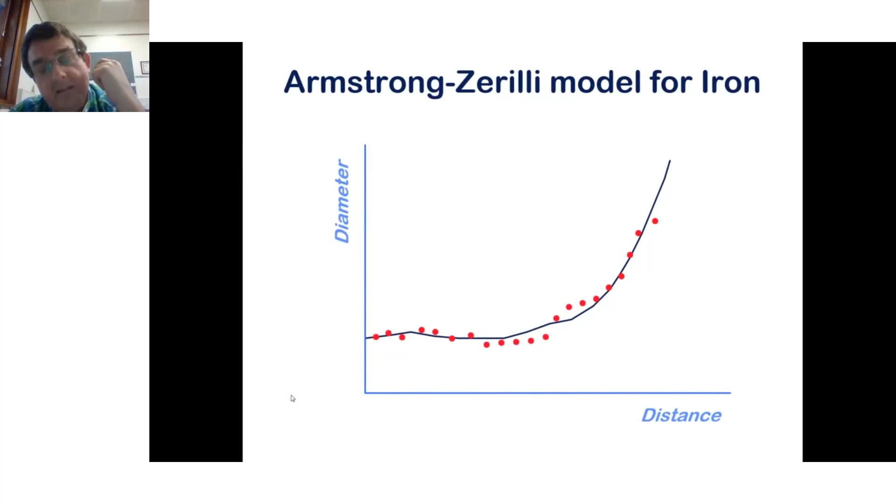People tried to model this, and Ronald Armstrong and Frank Zerilli came up with a model for the deformation of iron using dislocation mechanics. So now we're bringing in some microstructure, some mesostructure, some crystal-sized structure. We're bringing dislocations into our model. This model is quite widely known, and it was very good at predicting the shape of a rod like that, and you could compare the diameter of the rod with distance along the rod. The dots are the experimental data. The black line is the prediction from the model. It looks pretty good. You can go home and say, I'm happy, I've explained this data.

Okay, let's not do iron, let's do copper. So the diameter of the rod, it's got this bulge in it about 2/3 of the way along. The diameter is quite big, and then that bulge shrinks. And the model says it should just expand in a monotonic fashion. Actually, something else is happening. Here, we're getting onto what's going to be a theme that I will be bringing up again and again through the rest of these presentations.

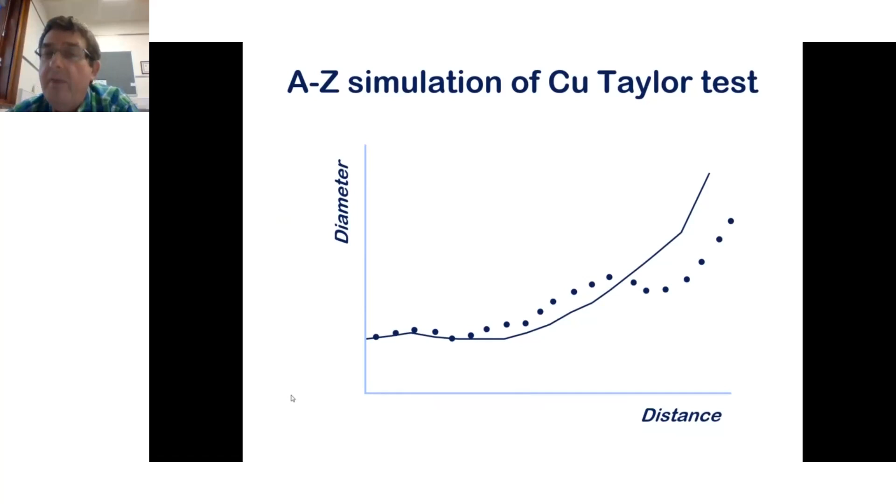Iron and copper have different crystal structures. This means the way they deform is ultimately linked to, in copper's case, the history of the mechanical treatment of that material. Now, steel properties depend upon mechanical treatment as well, but copper has a much stronger memory effect, work hardens. There's a whole bunch of effects because of the crystal structure of the material. And this leads on to the increased level of complexity. Simple models give simple results. And if you want to match things more or less okay, that's fine. If you want to do things which are more complicated, then you need a lot more effort.

So what's my conclusion today? Well, material behavior changes with strain rate. Inertia is a big effect. Failure processes take time. There are a range of platforms being developed, often with a simple analysis based upon isotropic strength and a failure-free model. And it's a good first level approximation. If we want to improve, we have to bring in extra diagnostics, and that's going to be the subject of the next two presentations I'm giving.